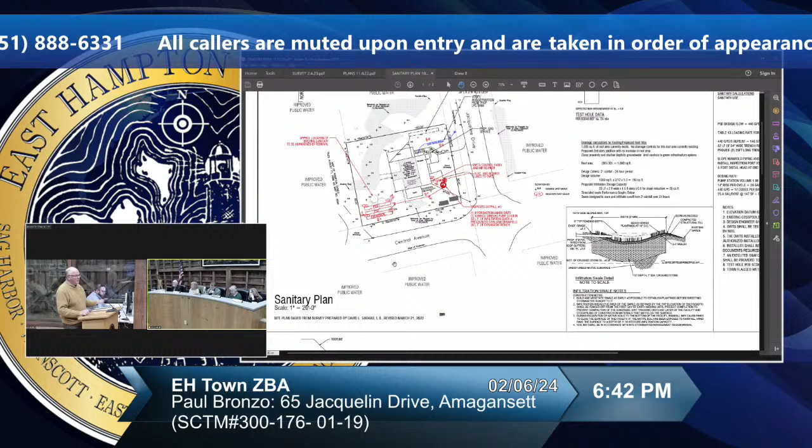I'd also like to point out that even if we weren't doing the addition, if the owner was doing this voluntarily, we would still be left with the same balancing act in terms of where best to site the septic system. So there's basically 3 locations on the property.

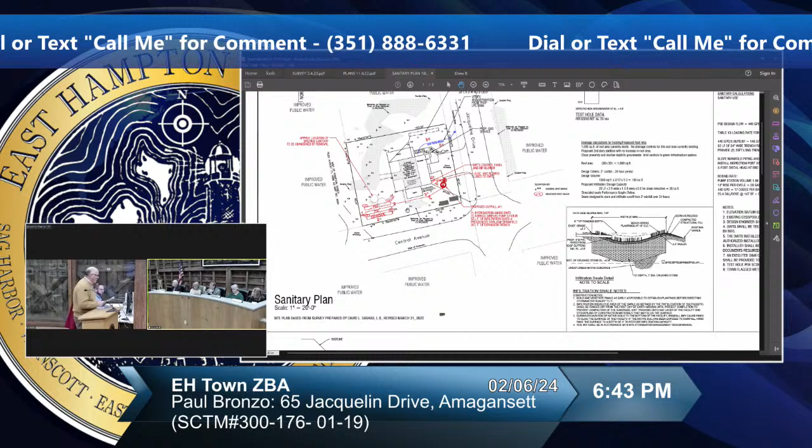It's a relatively small lot. It can either be the northeast corner. Do you mind if I go and point to the map? I think it'd be easier. I do not mind. I think the new microphone system is set up to hear you. Okay, good.

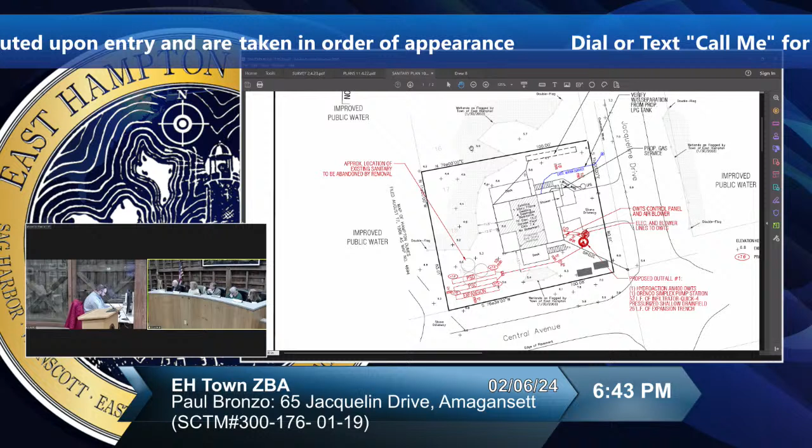North is in this direction. This is Jacqueline, this is Central, and we're proposing to put the treatment unit here in the front yard adjacent to the driveway and put the pressurized shallow drain field in the southwest corner of the property, which is here, which is in the same vicinity as the existing cesspools.

The other 2 locations we could talk about are the northwest corner and the northeast corner. We looked at all 3 locations, and in our judgment, this was the best location. I have to keep my directions straight here.

The northwest corner has some relatively mature woody plants and trees. When we sited the leaching field here, we'd have to relocate the existing water service, but we were actually closer to the wetland. When we moved this into this corner, 5 feet off the property line and 5 feet off the property line, we ended up 12 feet off of the wetland area. This current configuration is actually 15.1, I believe.

So in our judgment, because of the trees, which were fairly mature, and it didn't really gain us anything in terms of wetland setbacks, we didn't find that to be a superior site. We also looked at this location in the northeast corner, and it ends up being several feet from this little pocket wetland here. There's no perfect site here, but we felt that this was the best configuration in our judgment.

So if you had any questions on that, I'm happy to answer them. The means and methods for getting that pipe past that little pocket wetland there - in some of the photographs, you'll notice that this area actually is fairly open.

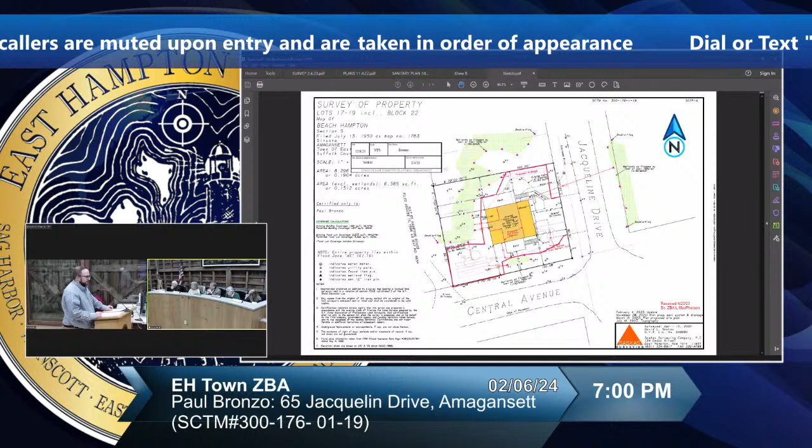There is some natural vegetation up in there, is there not? As of now, yeah, there's some. So I'm wondering if that swale, if we can somehow protect that from construction activity or limit it except for the swale itself. Construction or something. Yeah, rather than have constant construction activity getting into that.

Yeah, certainly we could always modify the project limiting fencing areas. If we wanted a different sketch to be included with any approval, we could make a new one.

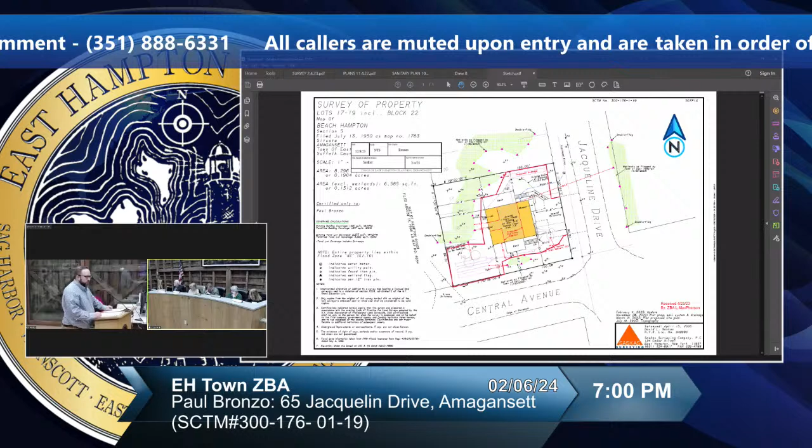Can I ask about the corner of the deck on the north side? It's so close to the wetland, it's not even 5 feet. Assuming the deck is going to be rebuilt in this project, are you confident they can work that tight around that side and corner? That would be up to the applicants to figure out.

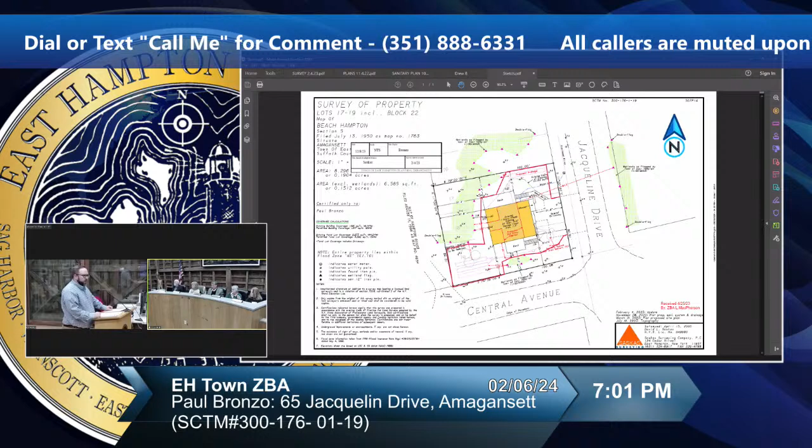Is it going to be rebuilt, the existing deck? It's on the CO. No, it's going to be rebuilt, I'm just asking. I don't believe so, but I'm not 100%. Oh, it won't be? Then we'll make it easier.

And the suggested area for the scenic easement would be between that project limiting fence and the wetland up there? I imagine over the wetlands themselves, probably not much else, because there's really no room between the house and the wetlands on that side. If one was established, that's probably the idea, pushing up, increasing nonconformity on an already nonconforming house.

Does the drainage swale require a variance, or no? It's not a structure, generally we don't require variances for structures that would be mitigation type measures. Additionally, it's not really a structure, it's gravel. For drainage structures in general, we don't generally require variances for such a thing.

Any other questions? No. Thank you, Tyler. Does anybody in the public like to address this application? Matt, anybody on the phone? You have 0 callers. Thank you.

Thank you. I have one more question for Britton, if I may. Britton, come on up. Maybe the architect's here too. I'm looking at the east elevation, and I'm not quite sure - are you going to take that part that's in front of the addition on the east side and create a deck there? I almost feel like I'm looking at a railing in this elevation.

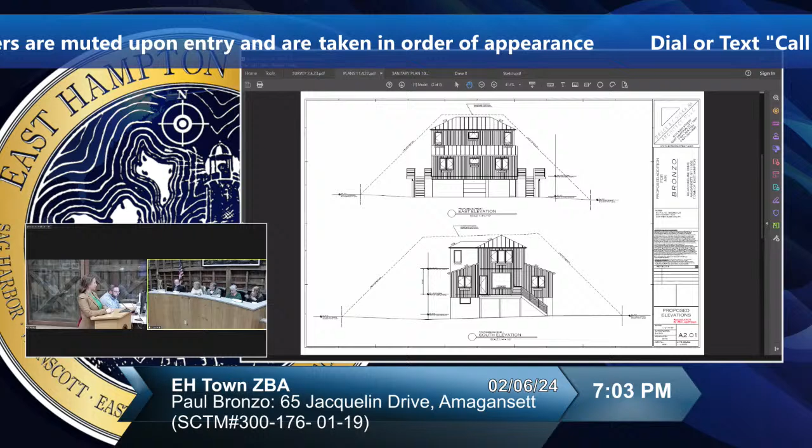Did an engineer need to look at the cinder block on that first level? Is it clear that it will support the addition on top of the house? My answer to that would typically be, you have a licensed architect - that's his responsibility to deal with that structure.

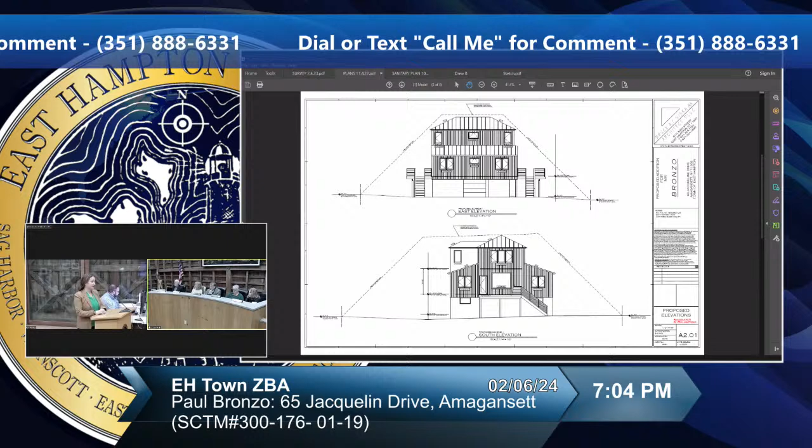Thank you, I don't have anything further. So just to be clear, is the public record open for Drew to make the modification to his plan to keep the one leaching pool and to do the trenching work by hand? That could be a condition of approval. I think minor notations, yeah. Okay, so then I request that we close the record.

Let me close it up. In the matter of Paul Bronzo, 65 Jacquelin Drive, Amagansett, Suffolk County Tax Map 300-176-01-19, make a motion to close the hearing and, are we leaving the record open? No, close the record as well. I'll second that. I concur. Concur. Thank you.

Next, we have the Surf Lodge at 183 South Edgemere Street, Montauk, Suffolk, tax map number 300-27-3-14. The size and location is 56,740.66 square feet at 183 South Edgemere Street, Montauk. The description is to construct a 645 square foot retractable awning as part of an existing trellis within setbacks.

On a parcel of land containing freshwater wetlands and within front yard line setbacks, the relief sought is a natural resources special permit pursuant to 255-420 of the East Hampton Town Code, and 2 variances are required. One variance of 95 feet is required from 255-430 in order to construct the proposed awning 5 feet from freshwater wetlands where a 100-foot setback is required. One variance of approximately 46 feet from 255-1110 is required to construct the awning 4 feet from the western front yard lot line where a 50-foot setback is required, and any other relief necessary.

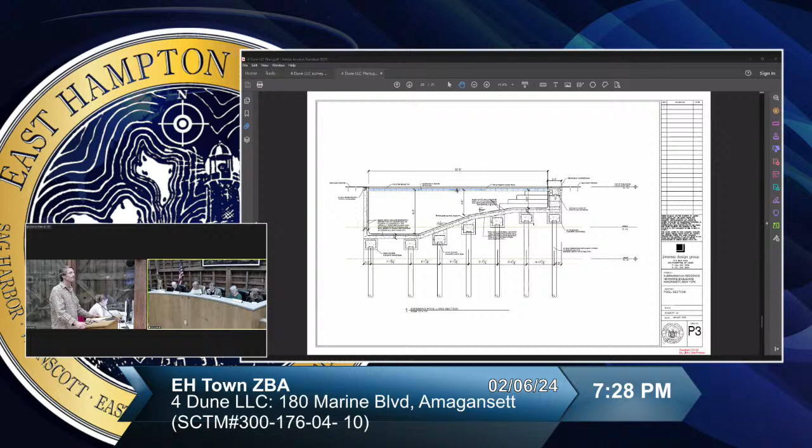I just want to understand, I'm looking at the survey, and you said the driveway is where? There are actually two parking areas at this home. On Dune Lane there's an alcove side egress where you go up the staircase to the front door, and then there's a significant driveway where the photograph showed possible water intake, off Marine, where that concrete slab is. That's where the driveway pulls in. It's a typical driveway, 15 feet wide, 14 feet wide by at least 20, 30 feet deep.

It's not seen on the survey. It's in the right of way. The driveway is just on the dune side. Dune Lane, there's no driveway on Marine Boulevard. There is, there is an existing driveway, can I go to the board?

Yeah, sure. There is a driveway right here, it says Stone Driveway, where I'm pointing. I see it. Okay, it's right here, so it's actually here, right where you see 7 feet. It goes where the 29.6 runs parallel to that line and goes all the way to about halfway where the swimming pool is.

Right, that's it. So you have the swimming pool existing, basically on a foundation. Yes, it's sitting on a foundation now. So demolition is going to be a pretty invasive process, taking that foundation out.

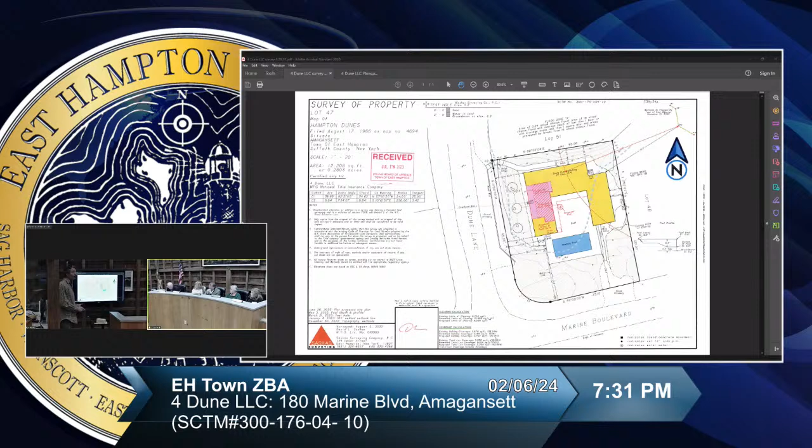Again, can I go back to the board? Sure. Because this is going to be an invasive demolition process. To a degree. It's not going to be as invasive as it would be if we were going in, believe it or not, with fresh, raw construction. Right, I'm not concerned about that. I'm concerned about how the natural dune features are going to be preserved that are there. We are not going to access anything in this area.

So then when you're saying this, to this side of the swimming pool, you were just mentioning to the west. So this is the west and the south. I was talking to the west of the driveway, but go ahead, I'm sorry. Okay, I didn't understand what you were discussing. So this is the driveway.

If we're going west, we are not going to interrupt any of this access. We're going to come as far as we can up the existing driveway.

We're going to hand demo all of this activity, the framing and the decking. That wall you see from the street is a knee wall that is a safety wall acting as pool fencing, so that will be removed. The burden of this retaining wall for the above ground swimming pool will be hand removed. There will not be machinery in there taking that.

That'll be done with sledgehammers and hand labor. Then the Bobcat, once it's ready and only when it's ready, will come up the driveway, and it will not interrupt this area whatsoever. It's going to interrupt what's already been interrupted in the ground. So we're going to pass the area of the high dune and this vegetation here, where you see 6 feet, 7 feet, 8 feet. We're going to come right here.

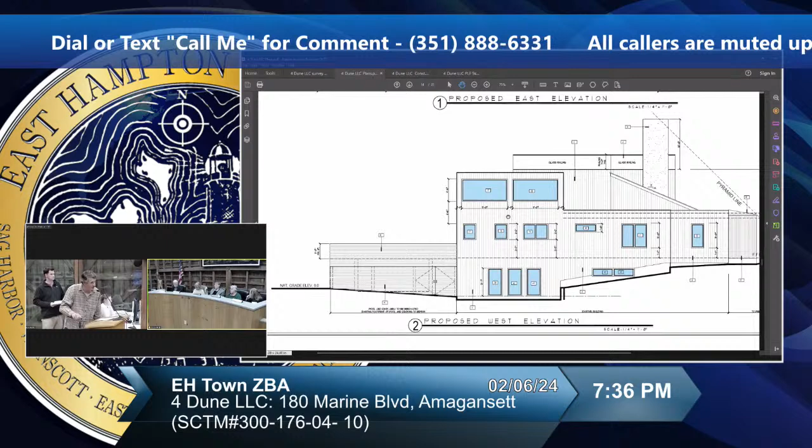We're simply just going to put horizontal mahogany screening on it. It's just transparent, cosmetic. Yeah, it's just an aesthetic, non-structural detail. Okay.

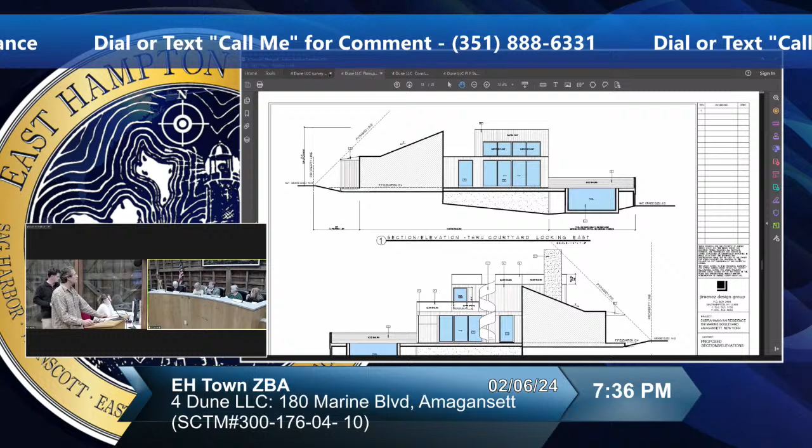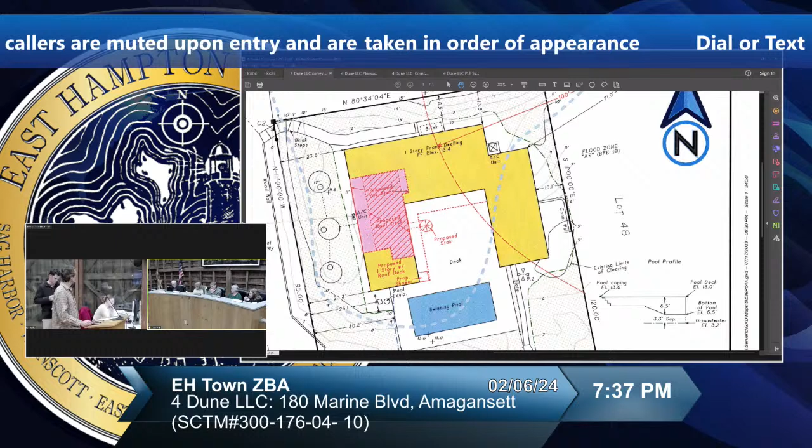I will have a question about the roof deck. Can we move to that? Can you bring the survey back up? Morgan, can you zoom in on that pink part, on the top? I didn't have a hard copy in my package, but part of it says proposed second story, and then part of it says proposed second story, or proposed roof deck. It's just a roof deck.

So is that a proposed second story? Because that wouldn't be noticed if there's no second story notice, is there? The survey is saying proposed second story, and I don't know why they would say that. There's an existing second story on the structure now that includes the primary bedroom. All that's proposed in our drawings is to change the staircase to that location, but that's not exterior and doesn't increase anything.

There is no roof deck over that structure right now. That's what we're proposing, to give access to that roof deck. Maybe it's just an error on the survey where it says proposed second story, when it probably is the existing second story with a proposed roof deck making use of that area.

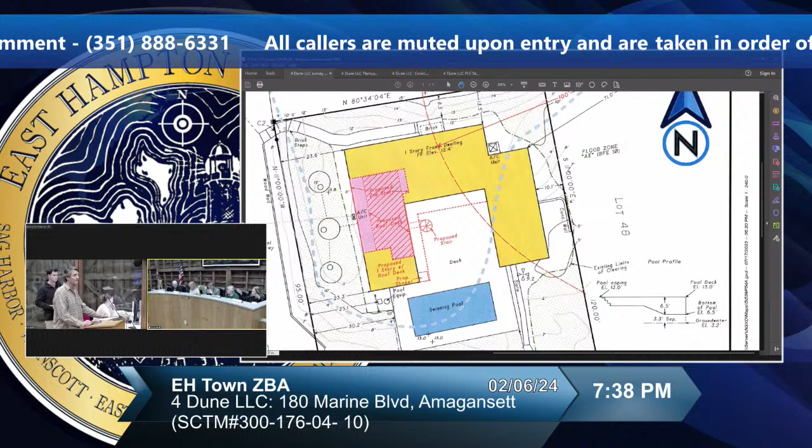Is the roof deck set in from the facade of the house with that dotted line, or is it the width of it? You see the break marks on the drawing, that's the footprint. So it's set in a little bit from it. Okay, thank you.

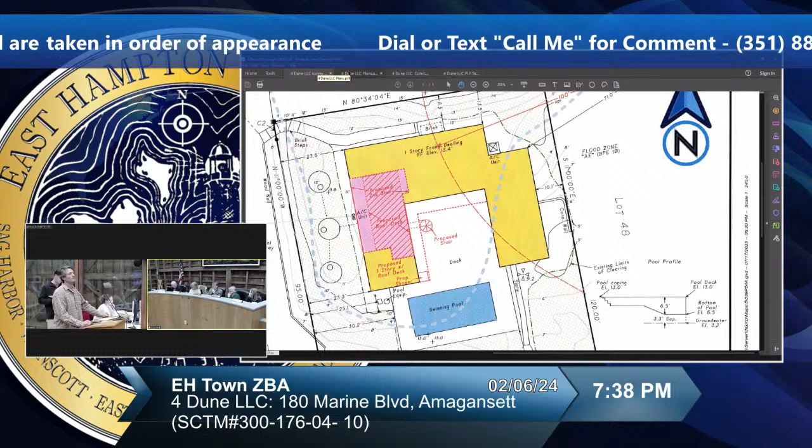It's hard for us to read this. I'm just going to make a comment that these plans seem very rudimentary and not very well developed. It's hard for us, and I do this as a living, to depict what's going on. We notice a barbecue on the roof deck, but we don't know where it is. There's no denotation on the building plans as to what's going on. I'll just make that comment. I'm not sure if other board members are noticing the same.

I was confused too. It's on drawing number 12. There's an area of proposed built-in barbecue. Where is it, Thomas? Drawing 12, proposed roof floor plan. Let me take a look at it. I see, my bad, I won't tell the architect. I was looking at a couple of sets of drawings in the file. Okay, thank you, that's a clearer picture.

On the barbecue, obviously there's a very large deck in the middle of the U shape of the house, but you want to put a barbecue on the roof? Correct, I'm just curious. Beautiful view, great area, beautiful to entertain. That's the owners, that's where they'd like to be.

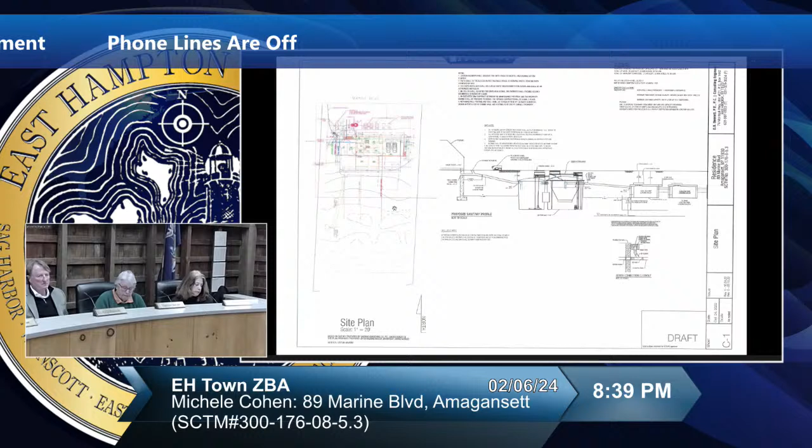The landward move of the residence, the walkway to the ocean, there's lawn in the back, lawn on the west, east, and north. The platform along the walkway, I believe, is also scheduled to be removed.

The only question is whether the setback is now 85 feet or 83. It says 83 in the chart, and 85 at the hearing. I took it from 85 and then saw 83 somewhere else. Either way, it's a much increased setback from the dune crest.

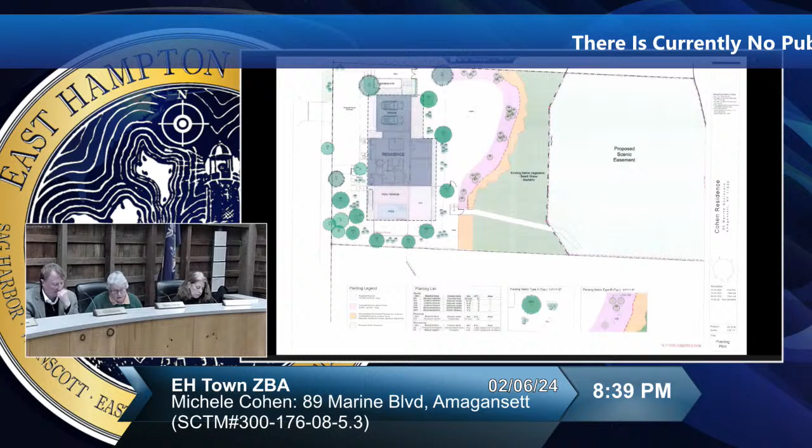I do feel it meets all the standards. They've offered great revegetation and a scenic easement. I think I said everything you said, and I too am looking to approve this. I feel it meets the standards of 25,551, the NRSP standards, and 25,540 of the town code. I too am looking to approve this entire project.

One comment, I agree with you on the resiliency. Moving off the dune, we are getting closer to the street, which will have an impact, but also the FEMA requirements will have an impact on where we go in the future. It's the nature of the beast, I think.

I thought that on behalf of the applicant, Britton was immediately amenable to all of the suggestions from the planning department, so immediately I felt like we were working in concert to try to come up with a solution. Thank you, yes, good application.